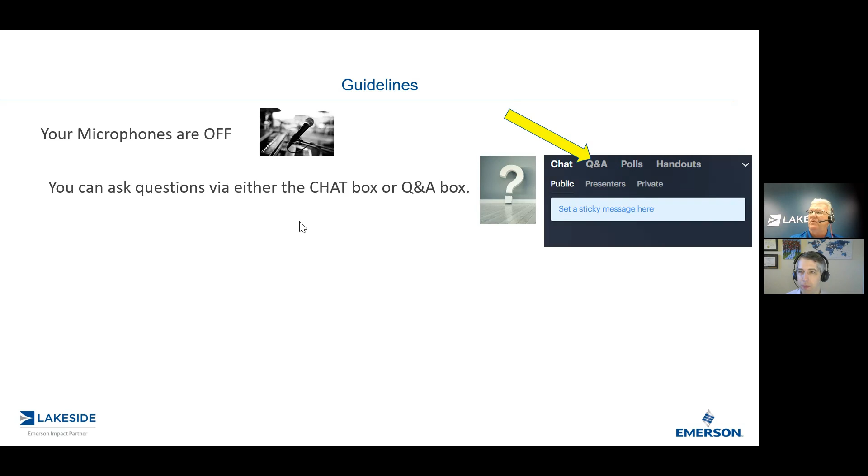And there is a 10-second time delay from the moment I speak to the moment you hear me, and that's just for better buffering and quality of presentation. So if you think that light travels at 300,000 kilometers a second, that means Devin and I are actually located in our spaceship here. I didn't manage to refuel it with element 115, so we're near the Lagrange point, and that's why there's a 10-second time delay. We can see the James Webb Space Telescope just on the horizon. So I believe, yeah, we can see your questions, can't remember if everybody else can see them or not.

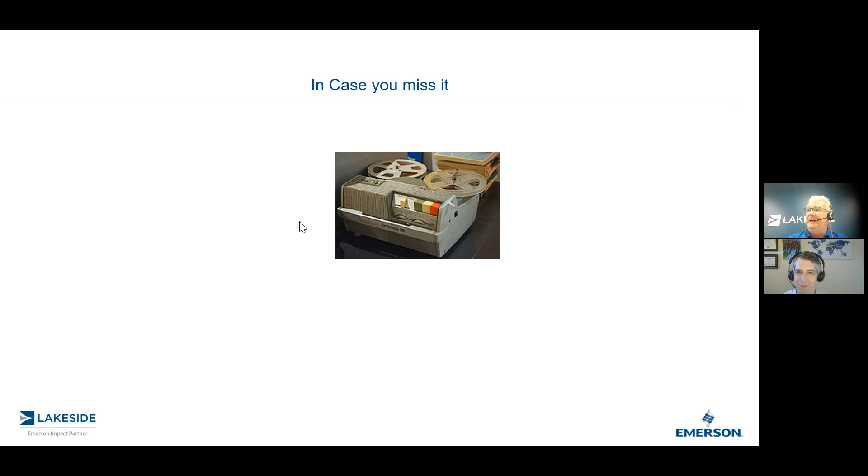A bit of a safety moment - yes, I know, kind of nerdy humor there. It is summertime, obviously barbecues, parties, and everything else. Be careful, don't drink and drive, otherwise you may be integrated with the police, so you don't want to do that. Be mindful - I enjoy my beer, but never do I partake and drive afterwards. Just be aware of that.

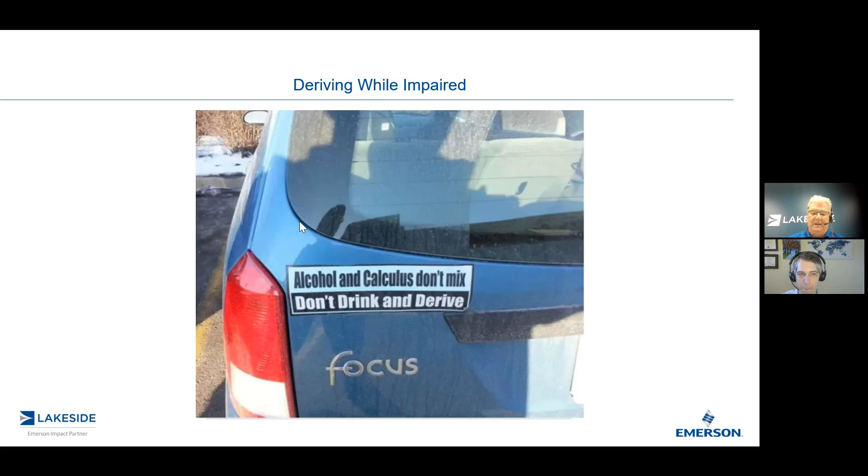A little bit about Lakeside - we'll get into Spartan Controls and the relationship in a minute here. This is a bit of a dated slide actually. We are over 400 employees. We have offices in Mississauga, Sarnia, Port Elgin, and a newer facility, not that new anymore, in Dundas, Ontario, where we actually do a lot of our fabrication, so we do skid manufacturing there.

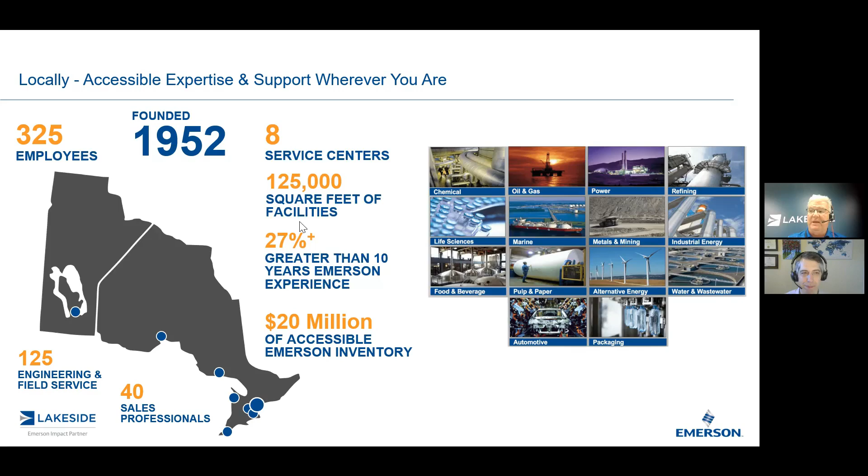Traditionally, Emerson used to do the valve repair services. That has since been downloaded to the Emerson Impact Partners, we'll talk about that, and so we do a lot of our valve repair business there. We have offices in Sudbury, Thunder Bay, and Winnipeg as well.

As I mentioned, we are part of the Emerson Impact Partners. Again, I think this slide is a bit dated - I show 21 Emerson Impact Partners throughout North America, but I believe it's actually gone down to 18 or 19. Lakeside's territory starts just this side of Kingston. I was in Napanee, Ontario, Eastern Ontario, in beginning of May - that is our territory, begins there, all the way to the Manitoba, Saskatchewan border and parts of Nunavut. Spartan Controls is to the west of us, covering Saskatchewan, BC, most of the Northwest Territories, and parts of Nunavut as well.

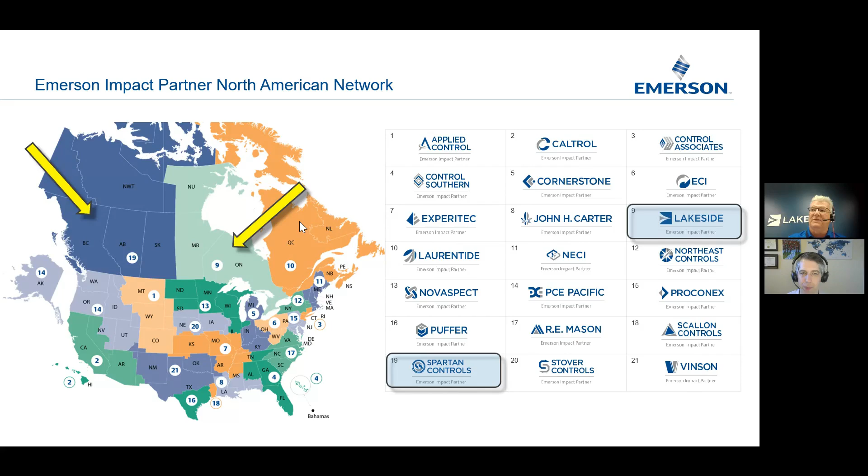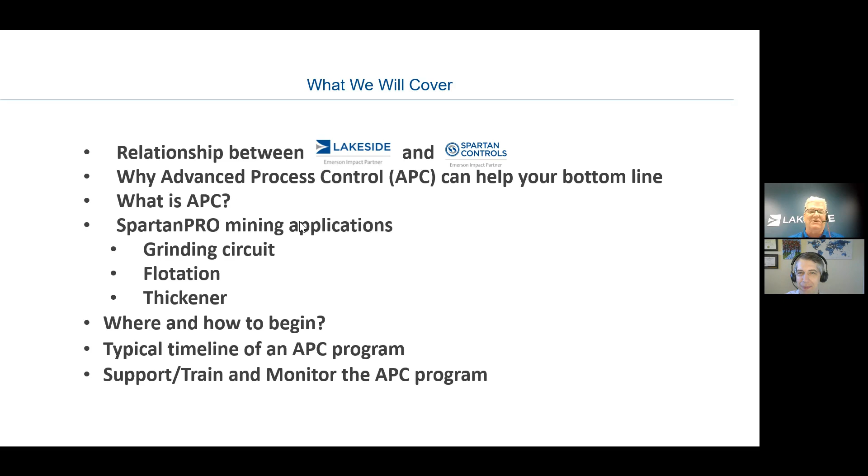What are we going to cover? We're going to talk a little bit about the relationship between Lakeside and Spartan. We're going to talk about advanced controls - what is advanced controls - and then we'll get into more specific applications that Spartan offers with Spartan Pro Solutions. We're going to show you what Devin Kuringer and I call the bread and butter, probably the more common applications out there right now, but it's part of a larger suite of offerings and solutions that Spartan offers. Then we'll talk about the implementation, the practical side - how do you implement this, what kind of timeline, and how do you sustain that technology, the magic word of 2024, sustainability, and get the maximum out of your technology.

So the relationship - as you can see, Lakeside and Spartan are both Emerson Impact Partners. It's been a long-standing relationship for as long as I can remember. Emerson decided that instead of having a large monolithic presence throughout the market, the customer was better served having a local presence, and I believe it's actually worked very well. Spartan has their customers, Lakeside has our customers, but we also work together. There are certain things Spartan offers that we leverage off, and likewise Spartan will leverage some of the stuff Lakeside offers - it's very complementary. Since Spartan offers these Spartan Pro solutions, we leverage off of that, we learn off each other, and we're able to support each other as well.

These Spartan Pro solutions cover many different industries. Obviously we're going to be covering the mining industry, but also oil and gas, oil sands - I spent a fair bit of time myself in the oil sands way back when. The coldest temperature I've ever seen was minus 48, January 4th, 2010, minus 48 degrees.

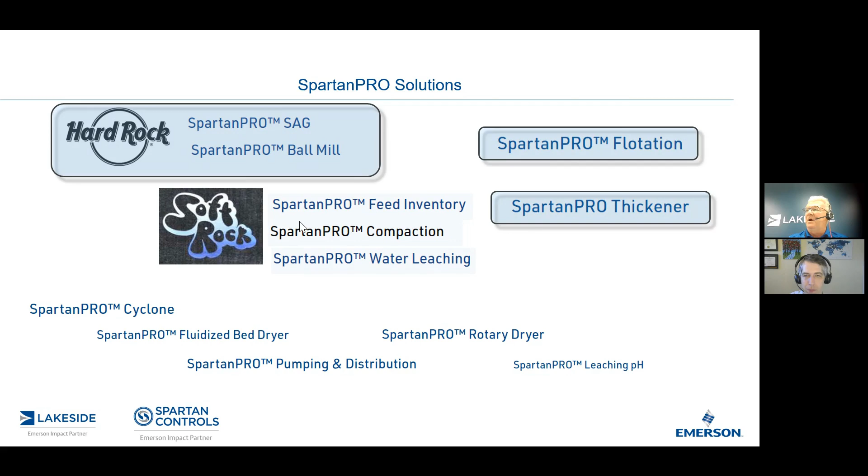In this webinar, we're going to deal with the SAG grinding part, the flotation part, as well as the thickener parts.

Spartan's not new at this - they've been working at this for quite a while. How long has this Spartan Pro solution been on the market? Spartan has been doing advanced control for over 20 years now. The first advanced control application went up in 2001. Since then, we've grown our advanced process control team and capabilities, expanded into new industries, and got into the mining industry a little over 10 years ago.

How many advanced control engineers does Spartan employ? Our team now is up to 18 advanced process control engineers, full time. That's the largest group of advanced process control engineers in Canada, and I believe the largest one north of Houston. Those of you who know Houston, the impact partner there is Puffer Controls, and it's always a bit of a fight between Spartan and Puffer as to who's the largest, for obvious reasons given the abundance of oil in both regions.

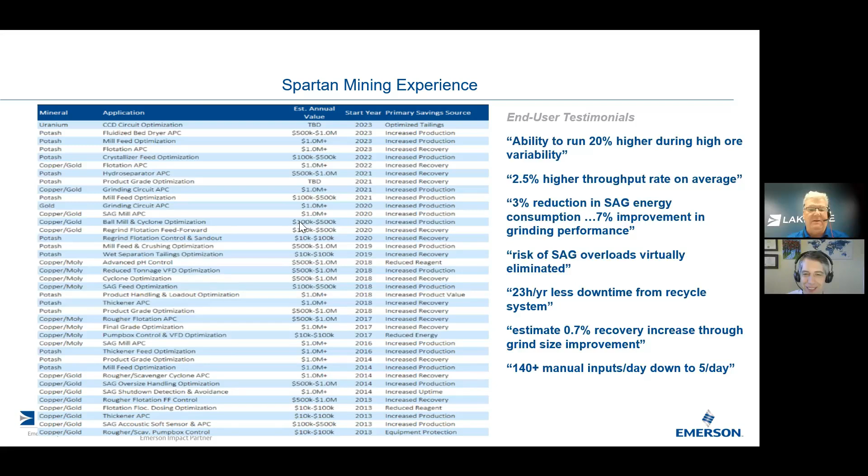No kidding. As a matter of fact, one of the applications we're working on here with Spartan Controls - not in mining - the estimated benefits we're looking at is in excess of $2 million a year. That's what advanced controls can do when properly applied. And what's the word again? Sustained - yeah, that's a big part of it for sure.

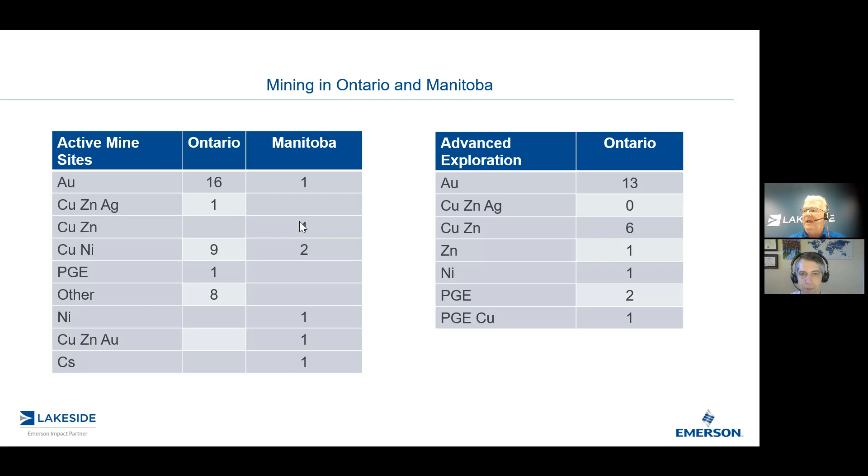In Ontario and Manitoba, I was surprised to see this. There's over 16 active gold mines in Ontario right now, and one in Manitoba. You can see copper, zinc, silver, palladium, platinum, and so forth. There's even lithium mines coming into play, and significant advanced exploration. So there's a tremendous amount of opportunities within Ontario and Manitoba right now to implement some of these applications.

Now why do we want to do this? Well, we talked about increasing throughput. Prices are good, so let's get the tons or ounces out the door. Increase yield, maximize. Let's face it, some of these gold mines are not always the richest. Some we deal with have 1 gram per ton, 2 grams per ton, which is kind of lean. Some go up to 9, 10 grams, maybe up to 20 grams. But say 1 to 2 grams a ton, you've got to be very efficient to be profitable. You've got to process a lot of rock to get some gold out.

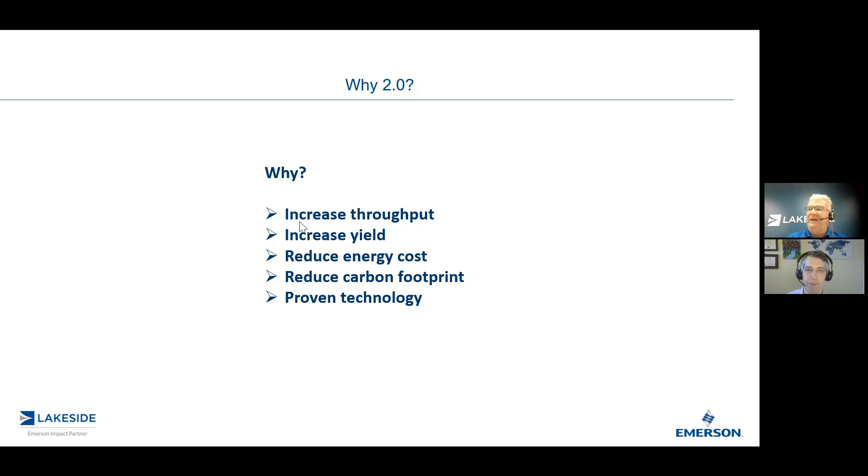Energy costs, obviously, are always a concern. Reduced carbon footprint - it's proven technology, and we all know about our beloved carbon tax. I'm not going to get on my soapbox, but greenhouse gas emissions and so forth are a concern to the industry, to us all.

Now, one thing I see there also is government incentives. There are numerous government incentive programs. Devin, can you add to that a bit?

Yeah, definitely. There's lots of avenues for government incentives, especially for energy saving projects. Lots are offered provincially, but there are also federal programs through NRCan that are available. Please reach out if you want more information on those. We can help you out with some of those links as well.

What kind of subsidies do we look at typically? They'll do subsidies typically for studies to uncover what the potential benefits of doing a project or implementing a new application to save energy would be, and they'll typically fund between 50 and 75% of study costs. Then they'll do the same for projects. Now obviously there's an upper limit on the total size of the project - if you're replacing a boiler or something, that's a bit of a different story. But for something like advanced process control in that price range, there's lots of funding programs available, again in the range of 50 to 75%.

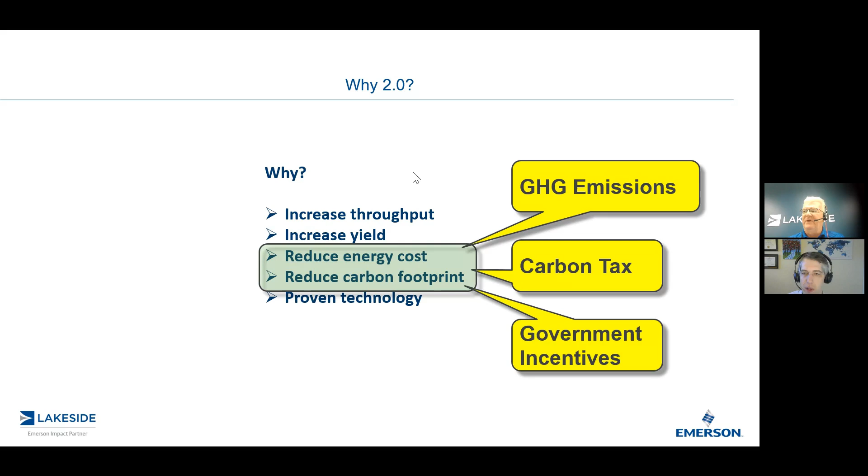That's awesome, good to know. Like I said, we can help you out with that - reach out to me and we'll set you up with the proper links and proper avenues. It's a bit of a labyrinth, I'm not mistaken. I know NRCan - I think you sent me a link once, it's almost like one-stop shopping on that website as well. Yeah, and they try to organize all the provincial incentives, which definitely vary by region. Perfect, because it can be a bit of a labyrinth, so it's not always evident.

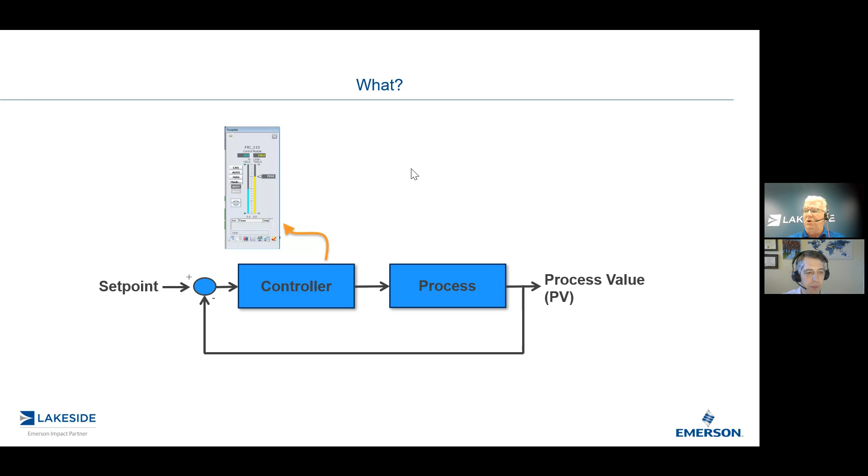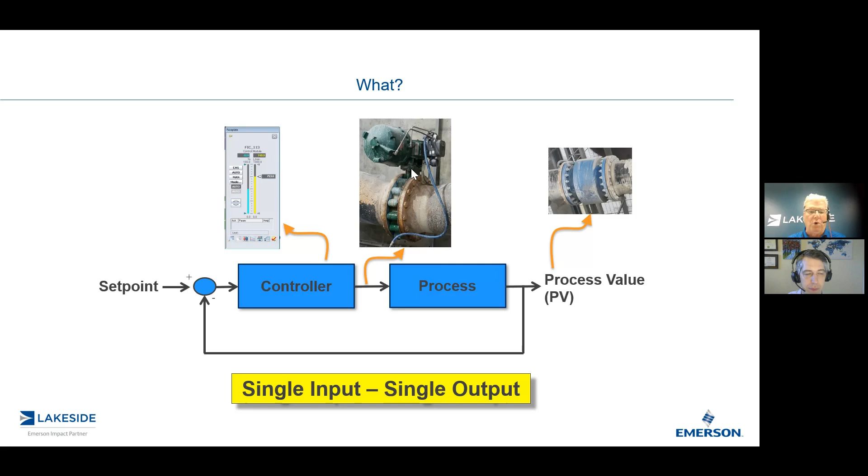So, what is advanced control? Well, before we talk about advanced control, we've got to talk about what simple control is. I think we're all aware of our regular controls out there: single input, single output. You have a flow controller - in this example, the output talks to a control valve, a positioner, and so forth. The process reacts, and then we measure the change using some measurement technology, and it comes back. This is known as a single input, single output strategy. But let's face it, no loop is an island unto itself, and processes can be highly interactive. This is where advanced controls comes into play.

Devin, do you know how many inputs it can handle off the top of your head typically? Yeah, up to 80. So you could have lots. Probably fly an Airbus with this, or a SpaceX rocket, who knows?

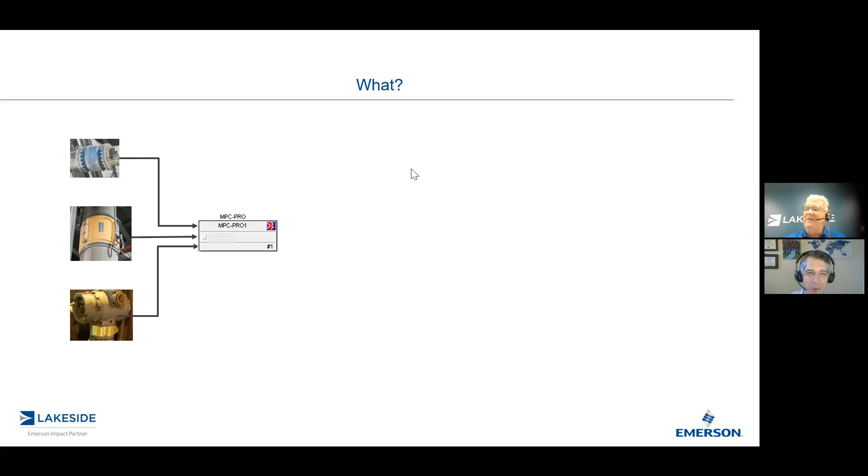So inside that algorithm, there's obviously a specific algorithm. It will then talk to multiple outputs as well. These obviously will affect your process, and all those measurements come back. So this is called a multiple input, multiple output algorithm.

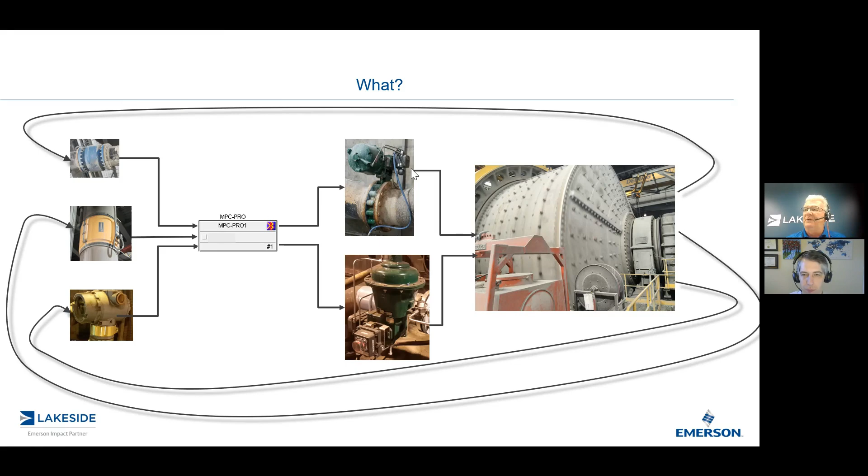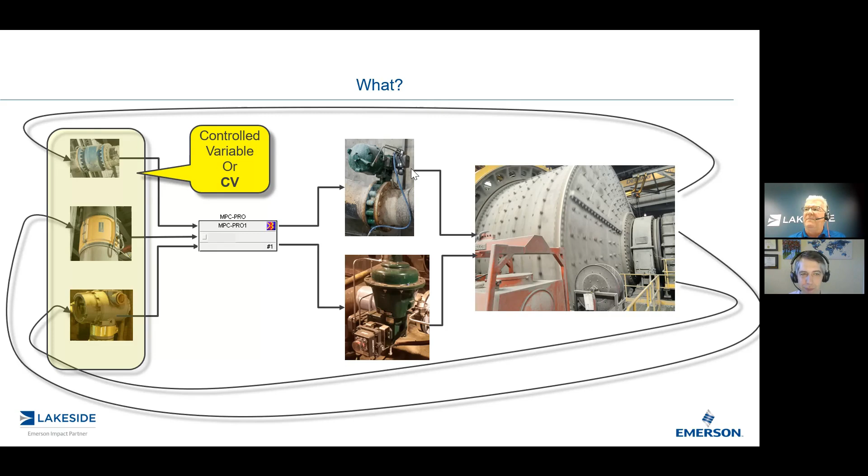Now, in simple, single input, single output control, we would call the measurements PV, process variables. The nomenclature kind of changes when you get into advanced controls. The measurements are called controlled variables. The outputs are called manipulated variables.

One last thing with this MPC algorithm is that it takes into account the interactions, meaning that if I make a change on my output one, it's going to affect my other control variable. Therefore, I'm going to do the equal and opposite change on that to minimize the interactions. It takes into account all the interaction between all the inputs and is able to minimize interactions as it makes a control action.

It also takes into account disturbances. So you've got this other measure, think of it as feed forward. Basically, that's exactly what it is. You've got this other variable out there, and every time it changes, it affects one or two or three of my control variables. So it can actually take into account and do some sort of feed forward control to compensate for these load variables out there.

It also deals with constraints. So you want to be able to maximize one or two variables. The algorithm, when programmed like this, will actually drive the output to a certain maximum constraint that we set it to, maximizing the whole throughput.

One last thing: a simple PID controller does not like process dead time or time delay. A PID controller is a very, very impatient beast. It makes a change and wants to see a reaction right away. MPC is able to compensate for the time delays. We tell it how much time delay there is, and therefore it builds quote unquote patience into the controls and is able to compensate for it. It's a dead time compensator. So it's very, very sophisticated, very advanced controls actually.

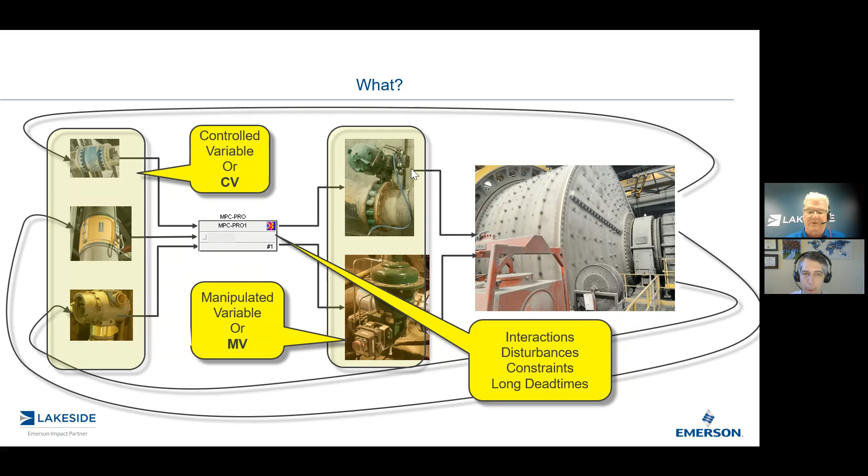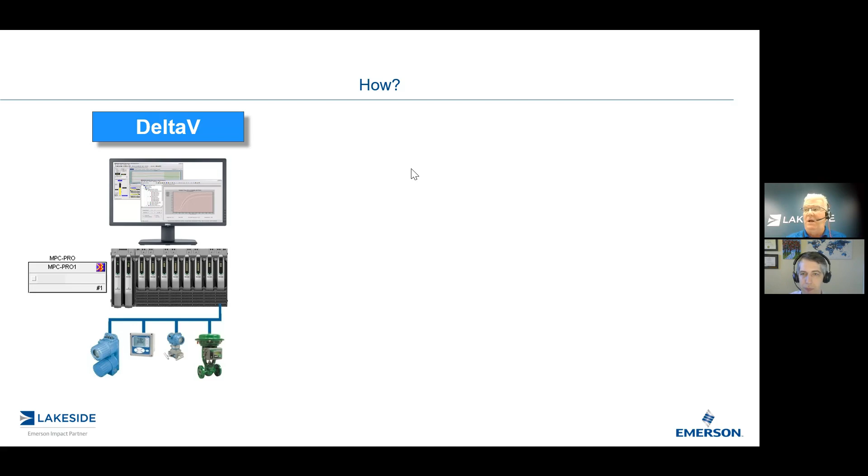So how do we do this? Well, you could do it two ways. If you have a Delta V system, the MPC Pro, the MPC Plus is native to the Delta V system, so it's actually incorporated within the actual control system, making it very transparent, very open. But what if you don't have a Delta V system? You can still implement it. What we do is implement it inside, let's say, a PK controller.

Devin, is there other ways we can implement it on non-Delta V systems? We show a PK controller. Can we implement it in different ways as well? Yeah, we can also do a server-based solution there as well. But the PK is becoming easier and easier and a more popular choice for sure. And then obviously this PK controller would control with your current control systems, your DCS or your PLC via OPC-UA.

The funny thing about OPC, if people don't know, is that it's an acronym of acronyms, which is kind of funny, because O is actually OLE, Object Linking and Embedding for Process Control. But I digress.

Devin, give us an example here. You've done DCSs. Can you give us a bit of range of other makes of DCSs you've implemented this on? Not necessarily in the mining industry, but overall in your advanced controls applications. Yeah, you name it, and we've layered Delta V for advanced process control on top of it. Honeywell, ABB, Rockwell, Foxboro as well. So for those of you out there, don't just think that it's a Delta V application. We can actually implement it on many different platforms as well.

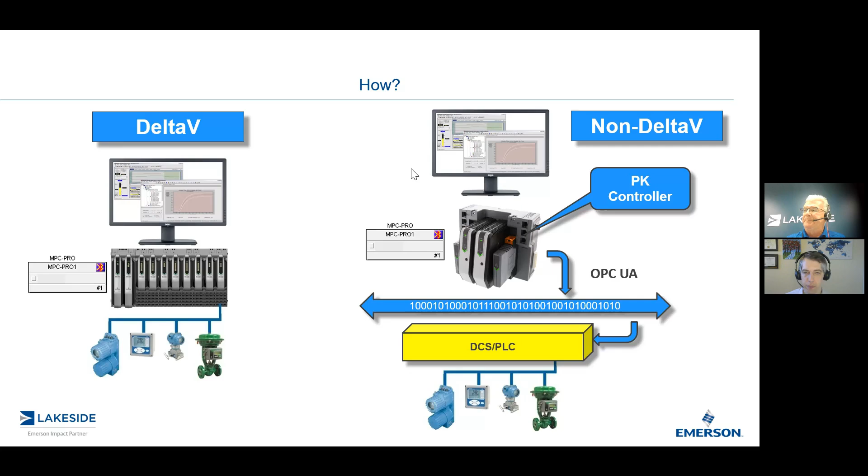Now, I usually have my own little slide here, but Devin put in his slide, and it's actually a lot prettier than mine. So let me see if I can actually do my pen here.

As we go up this way, we're going down that way. The idea here, and it's universal for any kind of troubleshooting, is that the first thing we must have is a properly designed process. Your piping, tank sizes, pump sizes, cyclones, everything else must be properly designed to achieve good control. Afterwards, we got control philosophy, control strategy - how is it programmed within your DCS to make sure you get good control? Instrumentation is critical - you've got to have the right instruments, specified, installed, and maintained. On the other side of the equation, your control valves must be properly sized, dynamic, and precise. If we don't do a good job with that, we will not be able to achieve any good PID control.

Let alone after that, it has to be properly tuned. I always say that loop tuning is the last thing you do. Not exactly true, because after that you can implement state-based control and, while we're here, advanced controls as well.

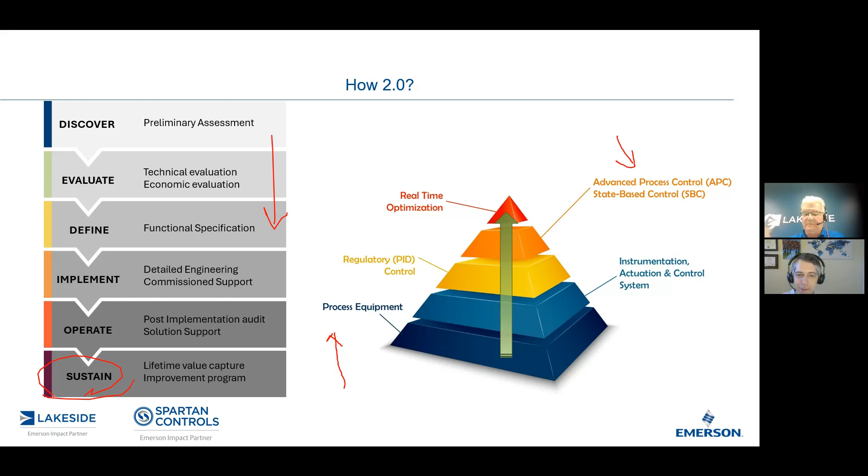Awesome, thank you. So like I said, we need to have a proper foundation. The first thing is the discovery part, the feed study, to establish where you are. We establish process-related issues, we address instrumentation gaps, and we talk about optimization of the PID loops before we even think about advanced controls.

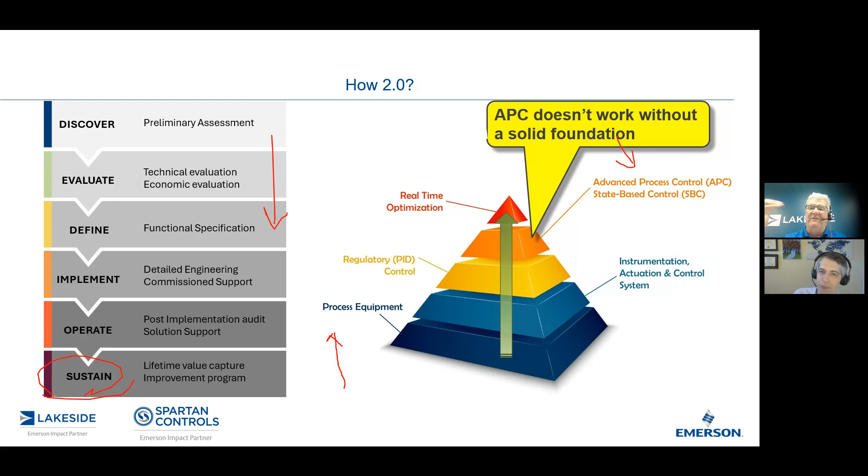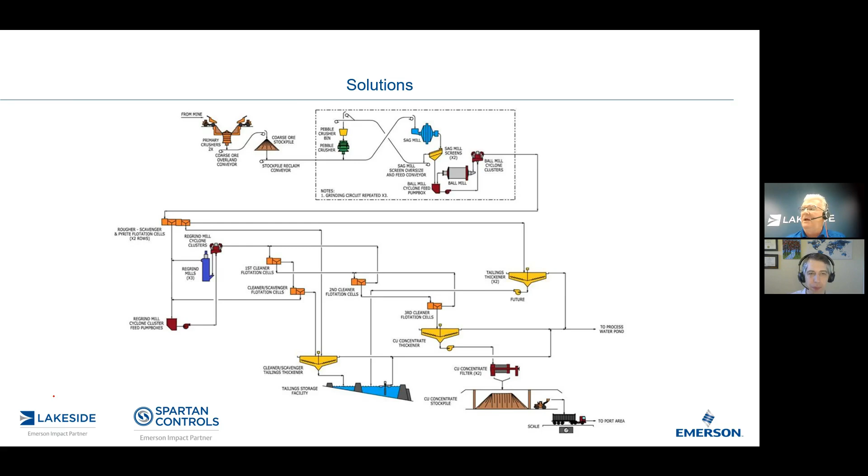So actually, I'm going to start talking less and less now. So yay, all right, and Devin's going to start talking a bit more. We're going to deal here, as I talked about, the grinding circuit, flotation circuit, and thickener circuit. So maybe Devin, you can talk a little bit more about what the grinding circuit does, and I'll let you talk to this slide right now.

Sure, yeah, thanks Sylvain. There are a lot more applications and processes throughout mineral processing facilities, and they'll vary depending on what your operation is - a potash site definitely looks a lot different from a copper mine. But we've picked three of the big ones in typical hard rock mining processes.

So your grinding circuit basically takes sized feed from the crushers and breaks it down to smaller particles that can float in flotation. With the grinding circuit, you're really focusing on getting that throughput. It's often a bottleneck, and it's also a huge power consumer, so you want to limit the amount that you use, and you need to make sure particle sizes are properly crushed and sized for flotation.

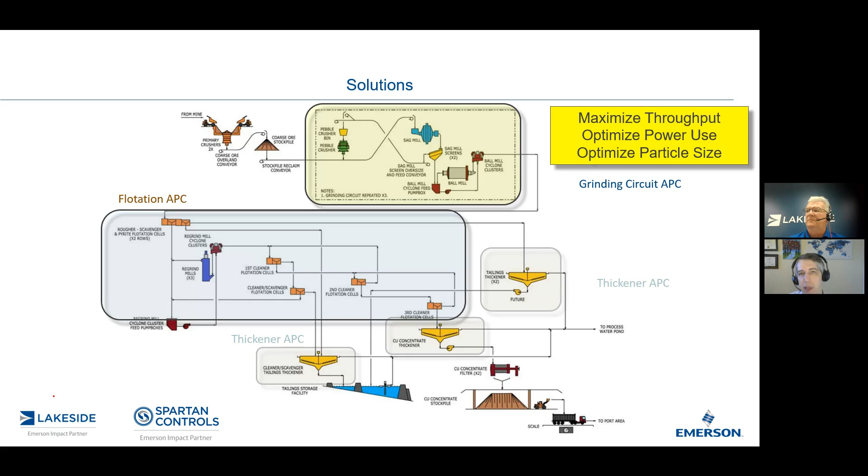Flotation's all about recovery. It's really about making sure you're separating your product from the undesirable materials and getting it to a purity that you can sell, but you're doing that in a way where you're recovering as much as possible.

And then thickeners are typically on the back end, but they can also be middlings thickeners in the middle of the flotation process as well. They're slower separation processes, typically where you're dewatering, or getting rid of, or doing a bit of dewatering before you're drying a product or a tailing slurry. So that's my understanding - the thickener may have a bit of a dual purpose.

It's to recover some of the product, the concentrate, that gets processed later on. But also the thickener is there because, obviously in mining applications, you have tailings, big ponds, and water is a big consideration from an environmental point of view and so forth. And obviously, it is.

Proper operation of a thickener helps reduce the amount of water in the tailing ponds, correct? Yeah, absolutely. The process is the same, but the application and the benefits vary depending on how you're using it and where you're using it in the process.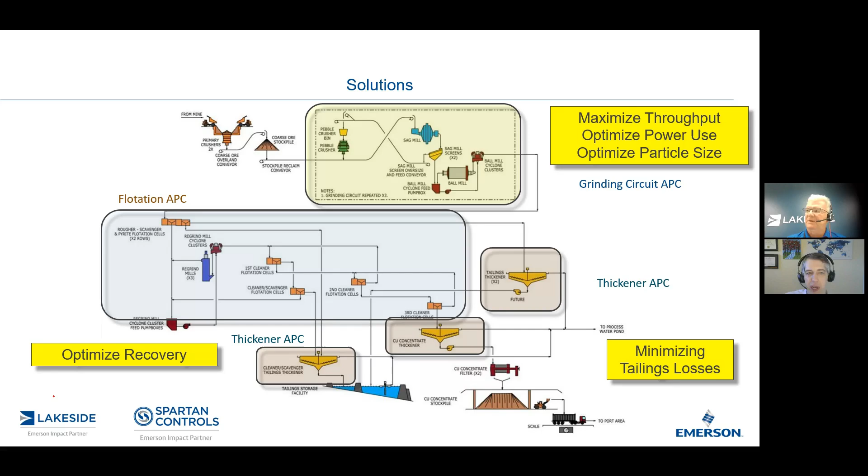Got it. Let's talk about some of the grinding circuits. I'll backtrack a little bit here and let you talk.

Okay, so this is a typical grinding setup in a hard rock mining facility where you've got crushed feed. It's taken those super large particles from the mine itself and gotten them down to the scale of inches. Then there's typically a SAG mill that feeds a ball mill within the entire grinding circuit, getting particles from inches down to microns.

So in the case of copper, they're targeting 100 micron feed to flotation roughly. So it's almost like, is that powdery form or sand form, or what texture would that have? Yeah, enough that it can float on a bubble of air. Got it basically. Okay.

Interesting. Now typically does a grinding circuit go from a SAG mill to a ball mill, or is it a ball mill sometimes? Typically SAG mill to a ball mill. There's lots of different configurations - there's rod mills in there, you can have multiple ball mills in series or in parallel. But the big one we'll see in hard rock mining is a SAG mill feeding a ball mill circuit, like what you're seeing here.

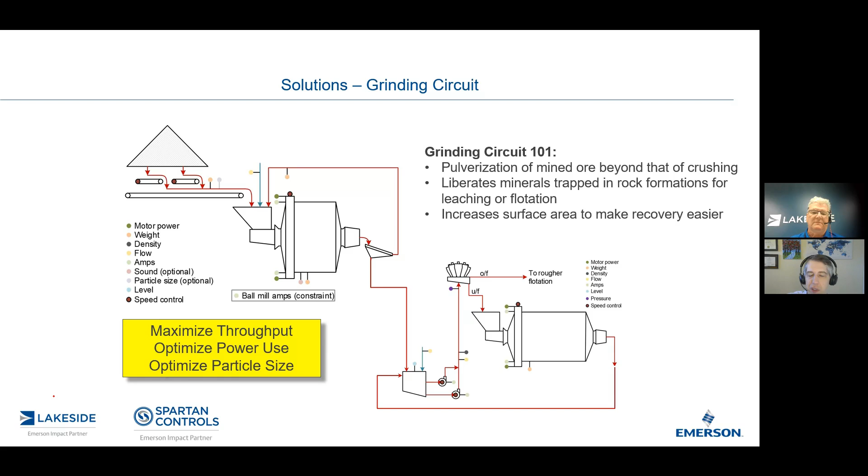They're huge energy users. Again, especially the SAG mill will be the majority of energy use on site, definitely the biggest draw. It's also often the bottleneck because it's a huge, expensive piece of equipment, so very challenging to operate consistently and reliably.

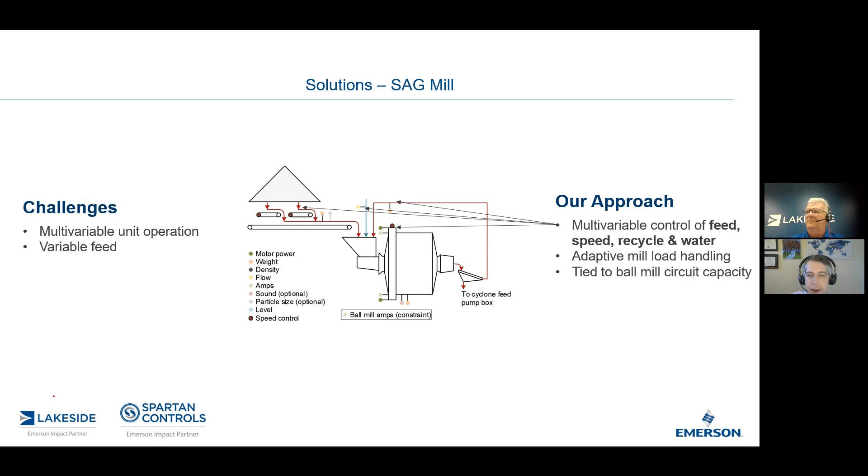For multiple reasons. A big one in mining that we'll see over and over again is that you don't have that precise measurement that you have in chemical processing or refining, where you know exactly what's coming in and exactly how much it is. In mining, you've got variable particle size, variable feed rates, variable composition, depending on where that ore is coming from and the location of the mine. And so you've got to deal with that uncertainty through controls. That's a theme that's going to be pervasive throughout this talk today.

What operations has to do on the SAG mill is figure out how to coordinate the feed rate to the mill with the speed of the mill. They're usually on variable frequency drives, not always, but most of the time. How much recycle do we feed back into the front end of the mill to maintain that optimal load, and how much water do we add to get the right density within the mill?

So it's a challenging process, and it has a huge impact on overall mill operation. It's a very linear process, so everyone's got to work together - you've got the SAG mill down to the thickener, down to the flotation. Everyone's got to work together, and you don't have a lot of buffer, not a lot of inventory, definitely.

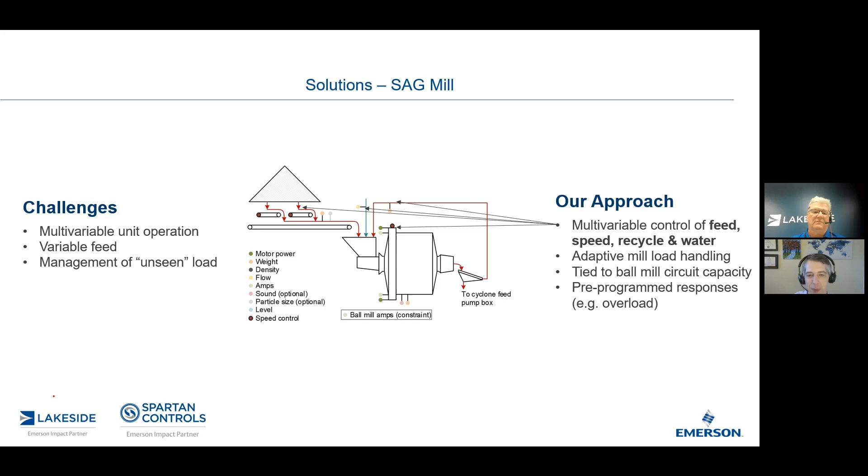To forgive any kind of changes in production rates, right? Yeah, exactly. You might have holding tanks with capacities of 5 minutes in there, maybe, that's about it. So measurement's a challenge for sure, especially on the feed end. There are starting to be more and more camera-based analytic sensors that might be able to get you particle size information, at least on the surface.

But a crucial part of this is measuring the load in the mill itself. We've worked with sensors based on bearing pressure, which will sort of give you the weight, but it's subject to drift based on how well maintained that bearing system is, the state of the liner, all sorts of other factors based on the state of equipment. I'd say best case scenario for a lot of these applications is if you've got technology like an acoustic array or a mill slicer that will show you exactly what the load is in the SAG mill itself, as well as where you're getting that impact point, which is a critical control variable.

Okay, cool. So you actually have acoustics that listen as it's rotating, to where it's actually falling on the other side? That's right. Wow. And there's a big difference in sound if you're impacting rock on liner versus rock on rock, versus if you're building up a large load and it's not falling as far.

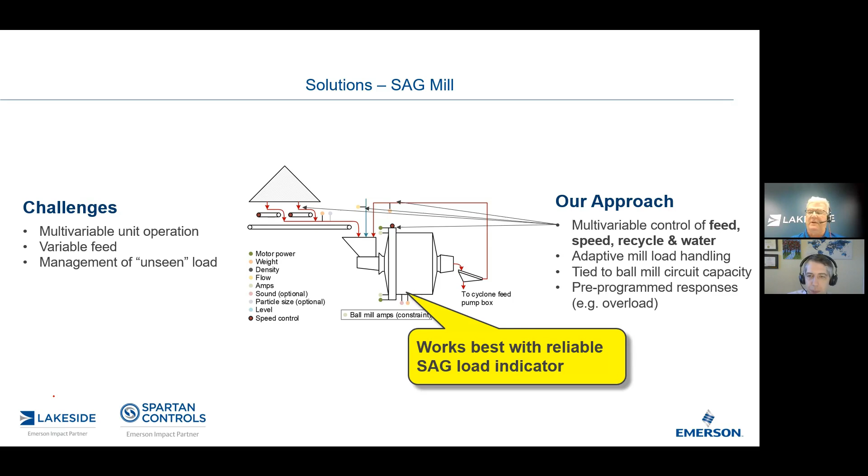Interesting. Okay, very cool. So what am I looking at here?

So this is a bit of a before. We've got a nice before versus after shot here, but this is the before case. Basically, operators have a pretty hard trip limit on the unit. They've set an operator alarm, shown as the red line there, a little bit away from the trip limit, and the trip is based on maximum load of the mill. They want to make sure they're not loading it up so much that the unit goes down and they lose a whole bunch of throughput.

So you can see over the course of roughly a month that operators deal with a ton of variability. Again, this is variability from feed quality, feed rate, composition, and hardness. So operators try to keep it safe and move it away from that trip limit.

What we've been able to do with control is coordinate the inputs and also get a bit of adaptive control in there. So when we see that variability start to increase, probably because we've got harder, larger particles feeding the mill, we'll actually back off of that limit a little bit more. Then when we get fine, nice, easy to grind particles, we'll push up against the limit. So we can run consistently within the level of tolerance, even under varying feed conditions.

This is an awesome before versus after shot, showing an average increase in throughput of about 2.5%. What this isn't showing, though, is that they were actually able to take that limit, which was set away from the real trip limit, and move it up because they had way more confidence in it. They were able to get a lot more than double the incremental benefits from running on control there.

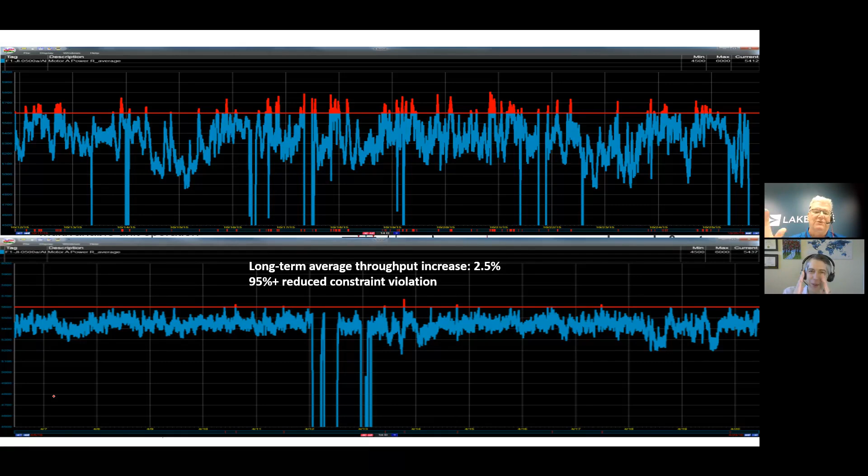Yeah, that's sort of your classic example of optimization, basically, right? Reduce the variability and then shift it. Exactly, yep, you got it.

What you want to do is keep that recirculating load at a nice steady level, so the ball mill is doing work and grinding, and you're getting good particle size out of the top of your cyclones going to flotation. What you really need to avoid is overloading the circuit, though, because that can quickly fill up the ball mill, which is a bit of a cascading situation. If that happens, they'll have to shut down the process. Hopefully they can catch it before operators have to dig it out, because that's definitely an undesirable situation.

So it's really important not just to control the way you're running your cyclones and ball mill, but that it's coordinated with sag mill operation. So if you see this start to get overloaded, you can actually dial back on the sag mill and sacrifice a bit of temporary throughput, so you don't run into a situation where you're overloading the circuit and down for a while.

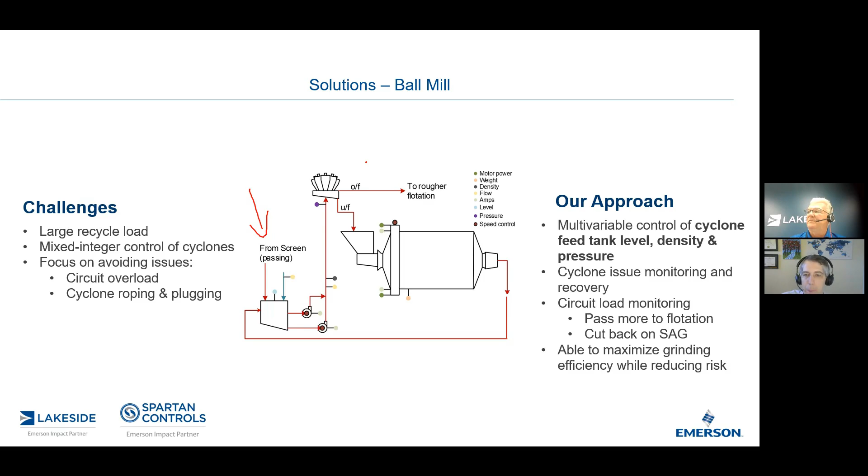Perfect. Talk a bit about flotation here. So how does flotation work? Right, so flotation, again we're moving downstream, like you said, linear sequential process. The feed for flotation, at least the rougher cells, is coming from that ball mill and the overflow cyclones usually. Flotation is all about applying a bit of a surfactant or reagents that bind to the desirable material and make it hydrophobic.

The reason we want to do that is hydrophobic material doesn't like being in water. So then we put it in the flotation cell. We pass air bubbles through the flotation cell, and again, it's a fine particle. So those hydrophobic particles want to get away from the water. They'll bind to the air and float over the top of the cell.

The more you try to recover all of the desirable material, the more you've got to pull over the top. And as you pull more and more over the top, you start to get a little of that undesirable material, the tailings. So you want to maintain that minimum viable or acceptable grade, so you still get that separation, but try to maximize recovery while doing that.

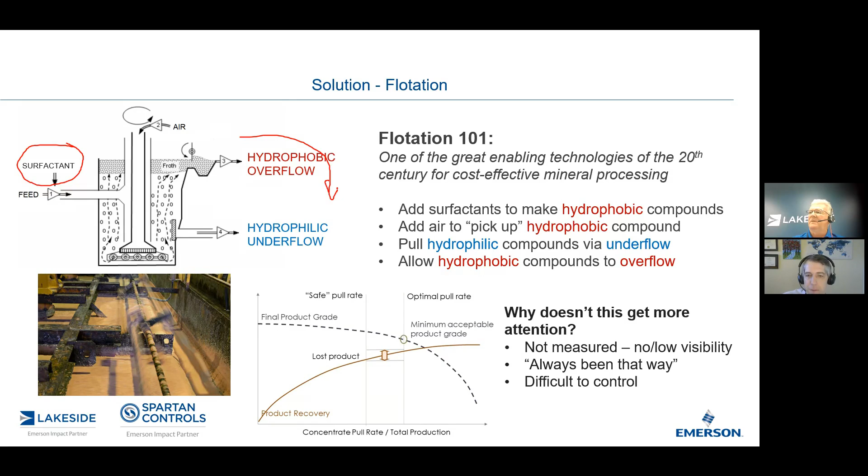The best thing you could do is get somebody who knows to tell you when the froth in the rougher cells looks the way it should. Then you take a good long look, and try to keep it that way.

So basically, looking at that statement, it's just sort of, if it looks good, I look at it, all right, looks good, or I think I should do this, and then next shift comes around and says, well, no, I don't like it to look like this, I like it to look like that. So you've got a lot of subjectiveness involved, and I think that's what we're trying to do, is make it more consistent, more deterministic, more measured.

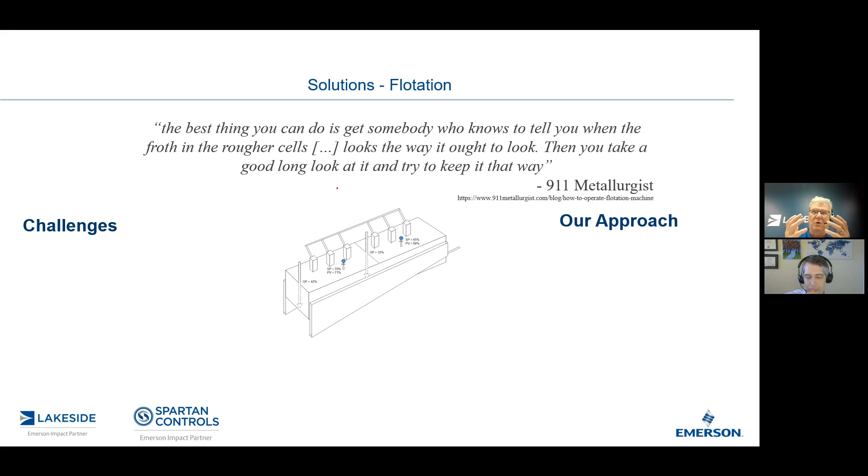And this measured operation is what we're trying to do here, right? Exactly. That works if you've got very experienced people that know the process inside out, assuming they're out looking at the flotation cells at all times and know exactly what to do in every situation to respond to it.

So I think we can do better with automation, and we've shown that we can do better, especially when you get those newer, greener operations crews in there that don't have the ability to do that well.

It kind of reminds me a bit. Those of you, if you ever saw me, you know I like to eat and cook, and it reminds me of when I make chili. If you like the chili I made today, enjoy it, because I'll never make it the same way again, I just kind of wing it. But when I make bread, I do make my own bread as well, and that's one thing where you have to be scientific. You have to measure by weight all your elements, so many grams of flour, water, salt and sugar and so forth. If you don't do that, your bread might not be very good, but all too often I made doorstops until I started measuring everything. So making bread, you have to be very specific. If you want to make chili, well, you can go ahead and wing it.

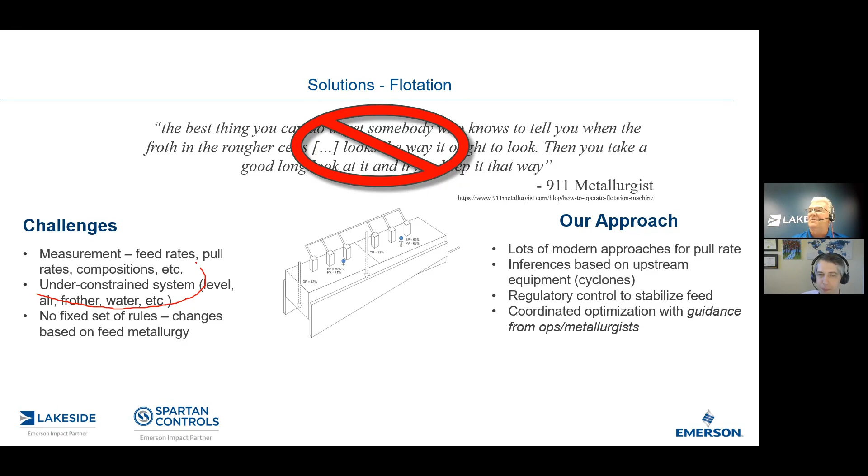One thing I see here, Devin, is under constrained system. What does that mean, under constrained system? Yeah, that's kind of one of the keys to control. So basically, you're trying to control the pull rate or the amount of froth that you're getting over top.

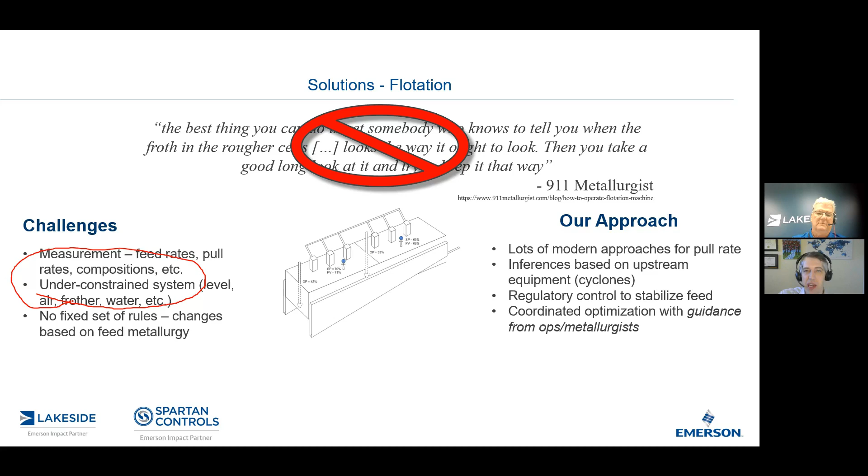The reality is there's lots of ways to do that. If you want to increase the pull rate a little bit, you could add a little more reagent, you could increase the airflow so more bubbles up, or you could raise the level. There's multiple ways to do that. If you're looking for a small change, you can maybe pick one and bump airflow up a little bit, and that'll get you a little bit more.

But if you're looking for larger changes, or changes over a long period of time, that approach doesn't really work that well. Basically what ends up happening is you make a little change, let's say you bump up your airflow, you start to get a little more over top. But if you continue to raise the airflow to try to get more over top, you start making the float cell very, very volatile, and that starts pushing over that undesirable material, and you lose that separation effectiveness. You start getting tailings over the top.

So basically, what this boils down to is that our philosophy for control of flotation cells is don't just use one of these handles, let's coordinate them and move them all together. So if we want a little more concentrate, we'll add a little bit of reagent, add a little airflow, and bring the level up. This way, we get a consistent, reliable performance out of the flotation cell.

So it means there are multiple ways to fix a problem—a little bit of this, a little bit of that. That reminds me of today: apparently it's going to be a hot day. I don't have fancy controls on my truck, just an air control, so you can have AC on maximum with a little fan, or less AC with more fan. There are different ways of controlling temperature just by adjusting the fan speed and the intensity of the air conditioner. I guess that's what under constraint means—there are multiple solutions, and this tries to accommodate all that.

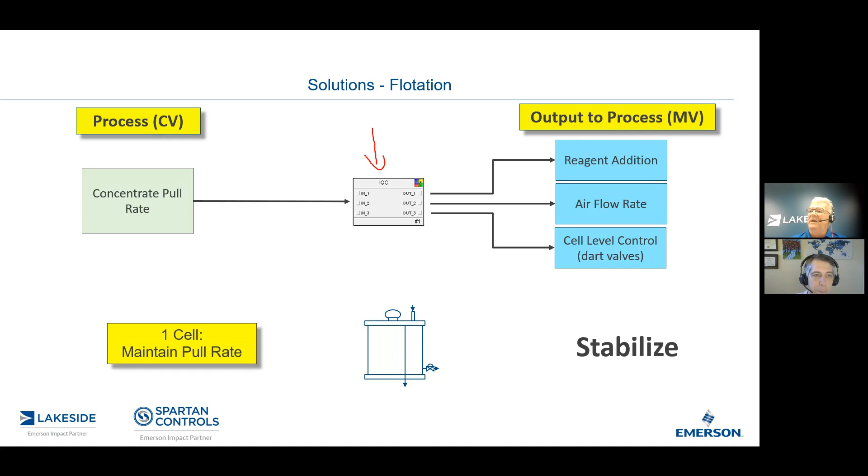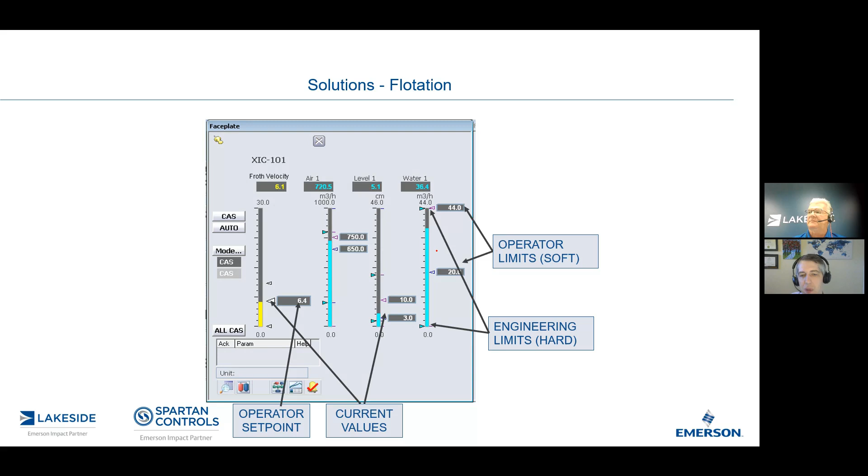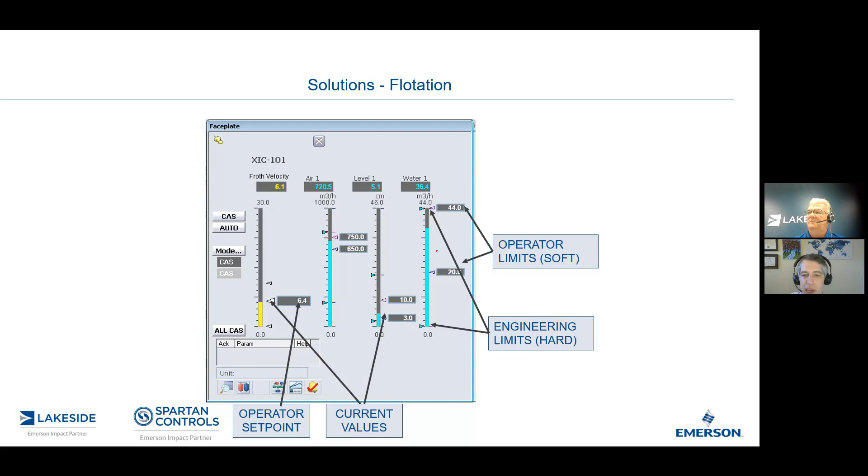Now I see you could do that for one cell, but you can also do this—there's a faceplate for how it looks. One key thing is that we get operators and metallurgists to interact with this control strategy—they set the upper and lower limits. This is valuable and has led to high adoption because feed conditions for flotation change all the time, and we almost never have the measurement technology to detect incoming changes to composition, particle size, or hardness coming out of the grinding circuit. So the reagent amount you use one day can be totally different the next, just based on where you're digging in the mine or where you're getting feed from. Until we get AI to tell us exactly where that is, it's a little difficult to come up with consistent control that always does the right thing. So by giving operators and metallurgists these high and low limits, they can guide the process or set boundaries based on where it is, without having to babysit it to make sure we're constantly pulling a decent amount of feed or concentrate from the flotation cells.

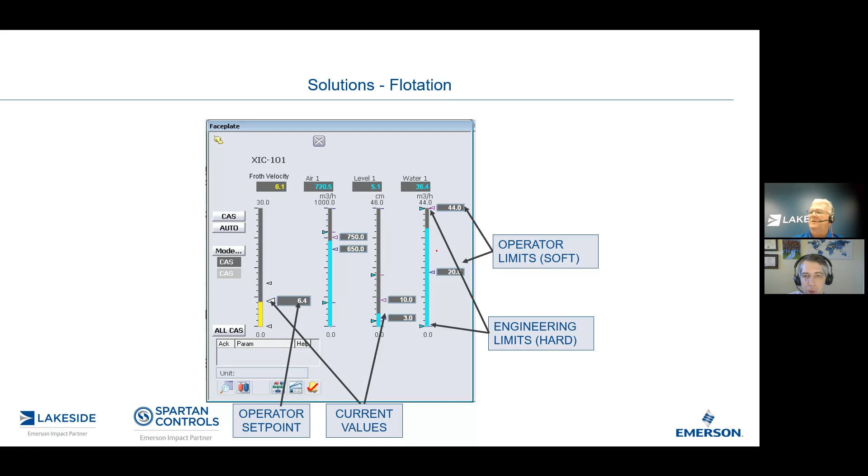From one cell we can actually work on bank cells, and then multiple banks after that. The quick version: we don't want to pull the same rate from every single cell—you get higher recovery off the first cell and significantly less off the back cell, almost always. So if you need to drop pull rate because of a change in flow, it's better to leave the first cells high to maintain that recovery, and drop the flow off the last ones, then slowly stabilize. This way we achieve stable control without significantly upsetting or disturbing recovery.

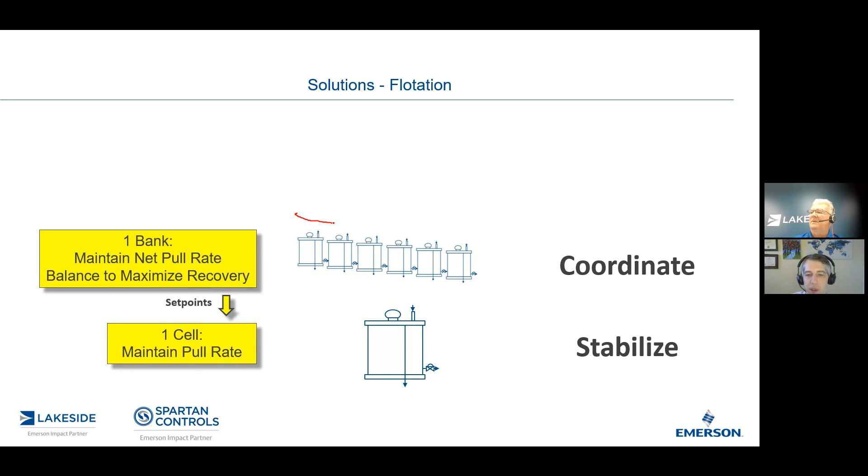And most of the recovery, correct me if I'm wrong, is usually done at the front end, and the rest is just picking up the crumbs after that. It is, yeah—depends on the process, but it definitely decreases over the number of cells in series. Perfect, okay.

This strategy, basically the way we've set it up, is IQC will cascade to the local individual cell controller, which adjusts things like airflow, frother addition, water addition, cell level, and reagent addition for those individual cells. So we've got a local controller maintaining stability within the cell, and then an overall controller coordinating the different cells.

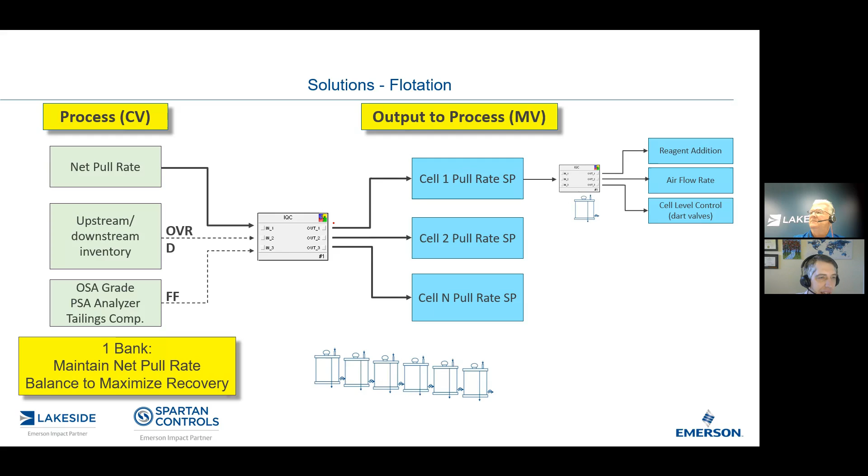So it goes further up in sort of a hierarchy, I guess. Exactly, and it doesn't stop there. We won't just stop at an individual bank. We can actually look at the circuit as a whole, and with the circuit as a whole, we can coordinate what's going on the roughers or coarse flotation versus the scavengers versus the cleaners and tailings.

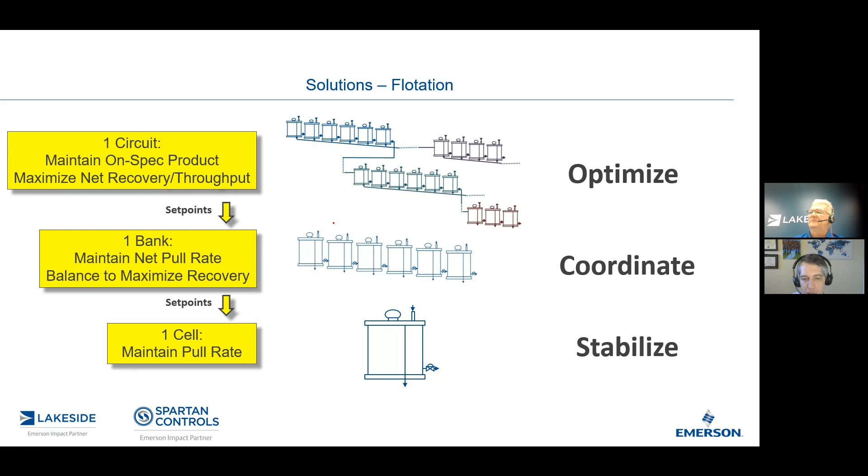If we're a little bit low on product grade, we can decide to back off a little bit, and we can do that selectively, like maybe back off on the scavengers before we back off on the roughers. Or if grade is high and we want a little bit more net recovery, we can also pull a little bit harder across the entire circuit. So it really helps drive that value, and we had that pull rate versus recovery trade-off curve that we're really trying to optimize with that top layer.

Awesome, okay. Yeah, and I believe if you... I think we keep clicking there. Okay, yeah, sorry, I guess I spoke ahead of this one. No, that's all right, yeah, it happens to me.

It really is about coordinating the entire flotation circuit across site to maximize that trade-off between grade and recovery. Awesome, and that's where the money is, actually, to be able to maximize. Yeah, stability's nice, but this is really where the money is for sure.

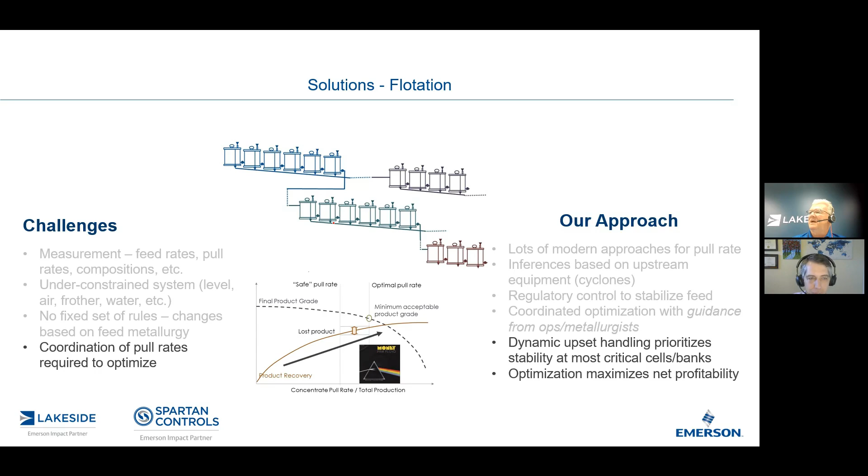Exactly. So when you zoom out, this is what the control strategy looks like as a whole. We're trying to control product grade, but then we've got decentralized control, so we've got separate control for the roughers and separate control for every cell within the rougher. And all this has to be looked at by the metallurgist in conjunction with the lab and the operation as well, so they'll make these adjustments on a daily or weekly basis. I guess it depends on the grade of the ore that they're pulling out.

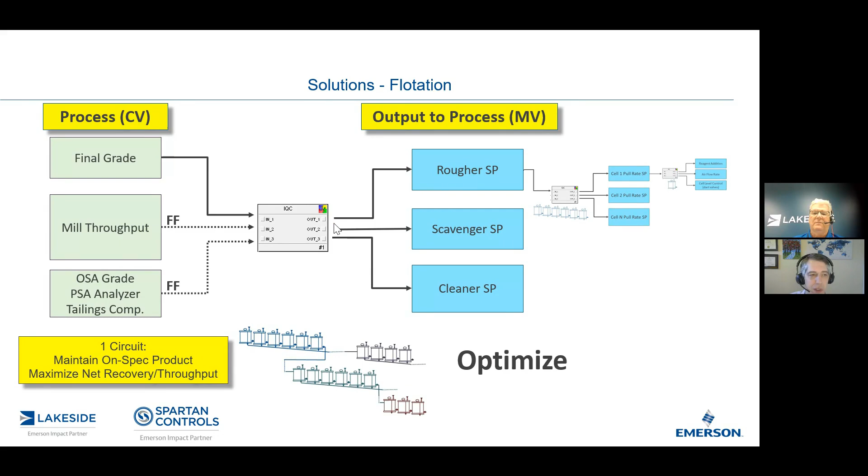Yeah, some mines are nice and consistent and have steady supplies of high consistency ore. You're probably jealous of those mines because most of them vary from day to day or week to week, and you've got to make adjustments. Metallurgists have to make adjustments based on that. Interesting. So we're trying to take the best of both approaches, where we're putting the power in the hands, and we are still relying on some input from operations and metallurgists, but they're really there to guide and manage the process rather than having to micromanage it with every small feed rate change or minor upset.

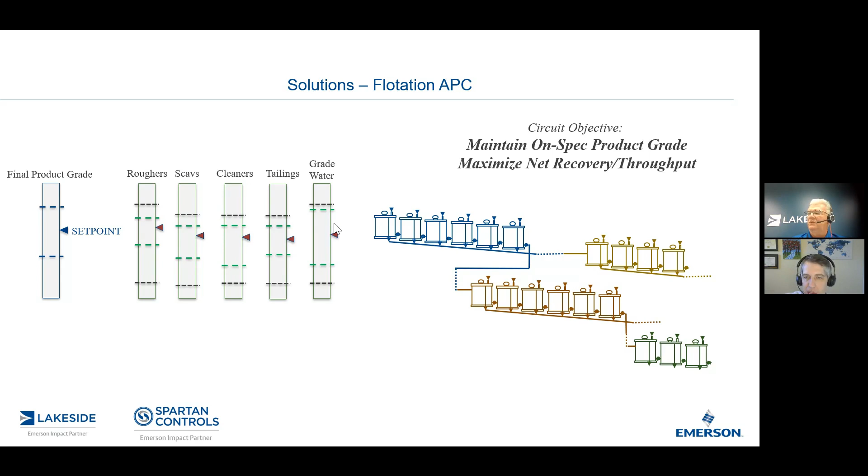Okay, let's talk about, there's more about flotation. Yeah, go ahead. So it drives a lot of value, and a lot of times this is tough to measure directly because you're not measuring recovery rate or grade off of each one of those individual cells or banks. You're just kind of measuring final tails and final product, and lots of things change day to day at the site.

But we've done a bunch of these projects, and all of them are around the same value where there has been an increase in grade. We're not entirely sure how much to fairly assign to flotation advanced controls, but it typically falls between 0.5% and 1% increased net recovery, which if you're a mine that's already running 89, 90% recovery, that's huge. And it can have significant value.

People don't think that just 1%, 0.5%, 2% - I mean those are big numbers. It's the gravy, it basically is the gravy on top of your French fries. Yeah, and there's also no increased operating cost, or very minimal increased operating cost for that, because you're not increasing the amount of ore that you're processing or mining from your facility. You're just getting more out of it.

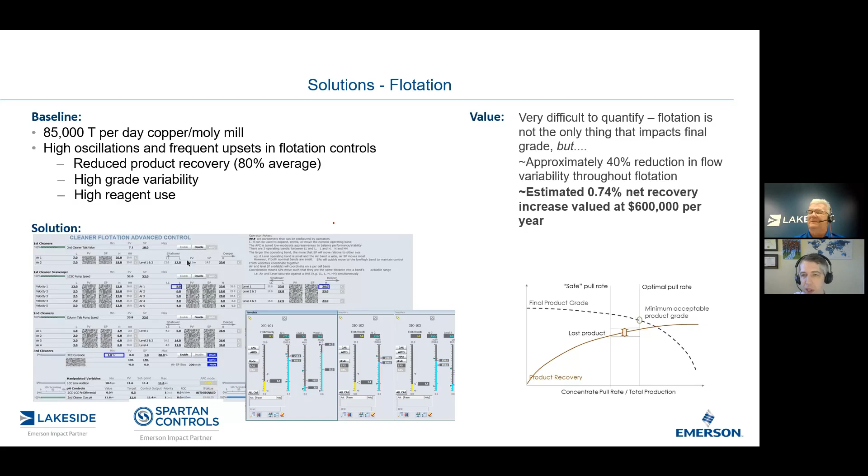Exactly, awesome. Let's talk about thickeners. Last but not least, it's a simpler control problem, and again, there's lots of different applications for thickeners. So you've got middling thickeners, where it does impact product recovery. It's a big, slow separation process that may be somewhere between the roughers and the scavengers to improve removal of the tailings and better separate your product. Or it can be final tailings thickeners, where you're trying to remove the water, reclaim the water, and minimize the rate that you're filling up your tailings pond at. So lots of different use cases here.

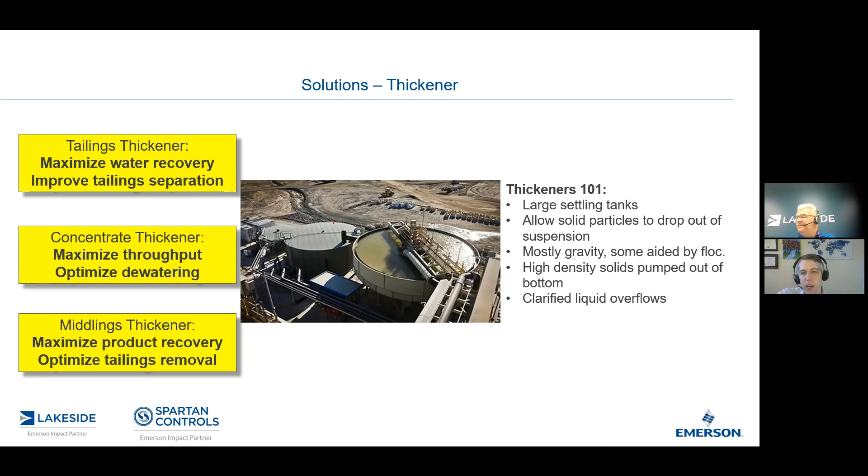But what they have in common is that they're these large, really large, high residence time settling tanks. And what they really do is they allow the solids product to settle to the bottom, and then it gets removed out of the bottom. And then over the top comes the clarified, or hopefully clarified, water or brine, whichever it is.

So the real challenge here is that it's slow. And this is why model predictive control is an effective control strategy, right? It's really tough for human operators, you, me, to react to changes that took place because of something that happened 3 or 4 hours ago. Like our brains just don't work that way, especially over things like coffee breaks and shift changes.

So when you get to thickener operation, there's a tendency to run safely. And safely in thickeners usually means pulling thinner underflow than you normally need. So you're just pulling more out of the bottom, and you're not doing as effective a job of really separating the process.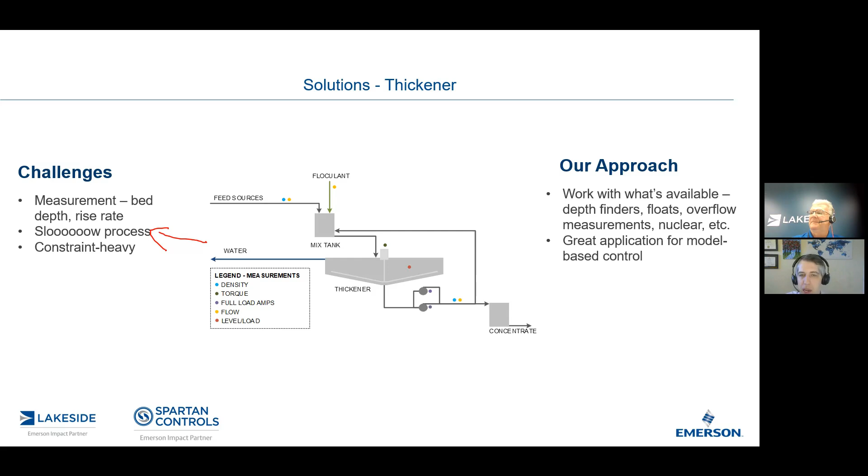Oftentimes there's a lot of value. If you can do a better job of predicting what's going to happen, you can increase that underflow density, or underflow solids, to a kind of a maximum level that your underflow line or underflow pumps can handle. Then you can do a better job of separating. You can also watch, some applications require that you watch the turbidity of the overflow, so all sorts of constraints you can incorporate there. But MPC does a great job of this, again, not because it's an overly complex application, but just because of that long gradual dead time.

Got it. Yeah, we're all, let's face it, we're all impatient, right?

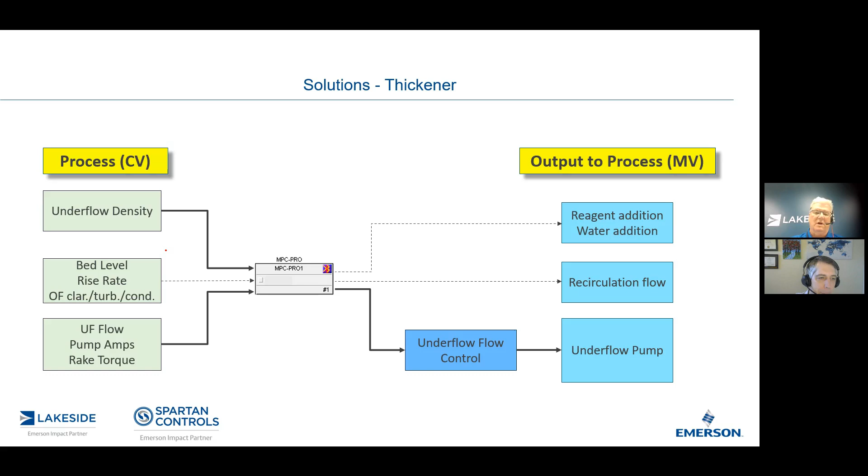Yeah, absolutely. So again, results are going to vary. In a tailings application, we can do significant reductions in the amount of water loss that you get while still doing an effective job of separating your tailings, which can have a huge impact, not day to day, but over the lifespan of a mine. It can be massive.

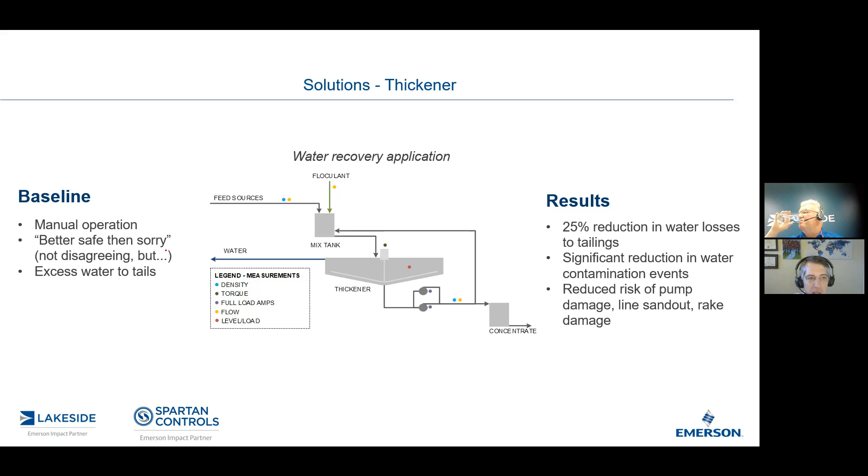Other applications where you're trying to increase, where you're actually recovering product, thickener operation, despite the simplicity of the application, if you go to the next one there, it can have huge value. And again, being able to increase product recovery just by getting higher solids out of the bottom can have massive value for operations, which matches or exceeds some of the other applications throughout the process.

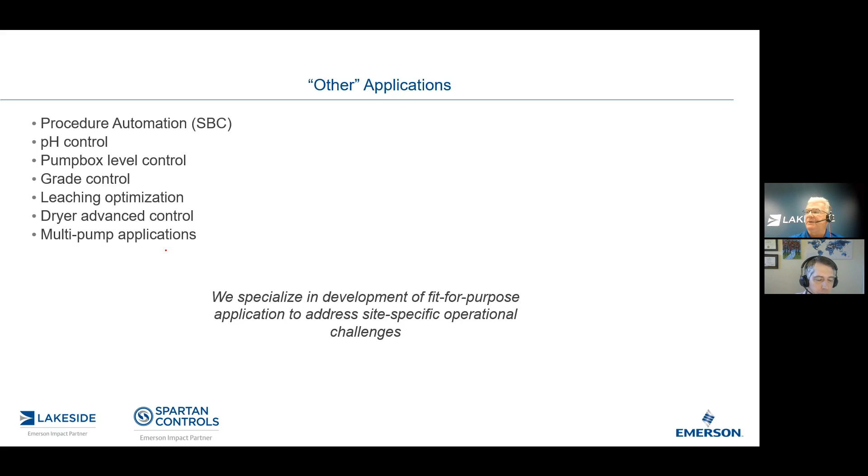Now, okay, so we want to implement this. What sort of timeline are we looking at here?

Yeah, so it varies, but we want to follow a process that leads to sustainable operation and realization of the benefits. So for a typical application, we'll start off with a proper front-end engineering design phase, make sure that control foundation is in good shape, and make sure we have the functional requirements and all these operating scenarios that we need to handle well developed. Then we'll go to configuration, testing, and then finally tuning and commissioning. So that whole process takes roughly 4 months, start to finish.

Of course, it's a little bit different if you're doing one thickener versus the entire flotation circuit, so there's a little bit of flexibility there. And it all depends also on where the instrumentation gaps are. You need to buy new instrumentation, do this, do that, or even some process modification. I mean, let's face it, that's going to take a while too. So that's sort of the big unknown, the front end engineering will determine that, and that's where that uncertainty of time based on what's required to get the maximum out of your APC comes from.

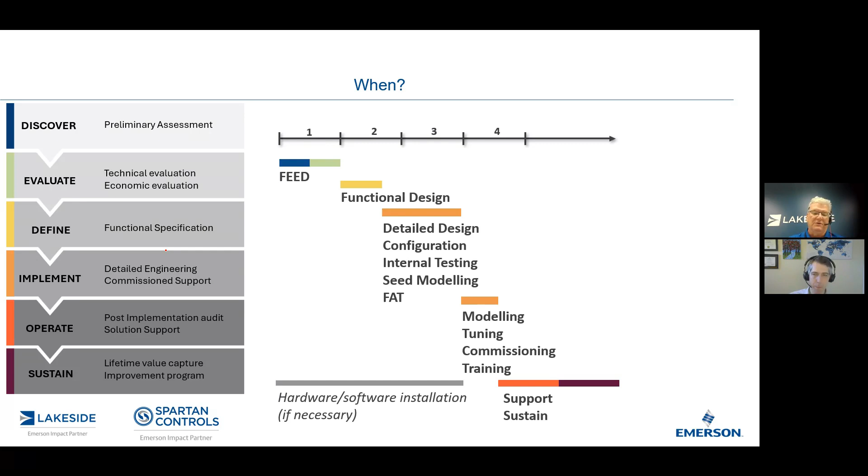So we got some hardware, and if it's a non-DeltaV system, some hardware and software that needs to be implemented as well. So now we got it running, we're all happy, and then suddenly, what happens most of the time, very often, is the fact that it gets turned on, it works, and then it gets used a little bit less, a little bit less, and it kind of dies a slow death typically.

This is where the difference is, where what we are offering, what we actually strive for, is to make sure that it is sustained, meaning that we're able to maintain that system, and that requires constant monitoring of the process, of the controls at different levels, at different timelines, to make sure we're getting the maximum out of our controls.

I think this speaks to the value that Emerson, I'm biased, but the Emerson Impact Partner Network, where we are local, we're not going anywhere, our customers aren't going anywhere. We want our customers to be our customers for life. So we need to make sure these applications don't have just a 3-month or 6-month lifespan. Sustainability is important, and it has been from day one for us.

The effort doesn't need to be massive, but it does need to be planned and intentional. So on a week-to-week basis, we just want to watch KPIs. Something as simple as our operators using it is often a good early warning indicator. If it's not working or if it's doing stupid things, they'll stop using it. And the faster you can get on that and correct situations that are occurring, the better. It might be a faulty transmitter, or it might be that the controls don't handle a specific scenario as well as they should.

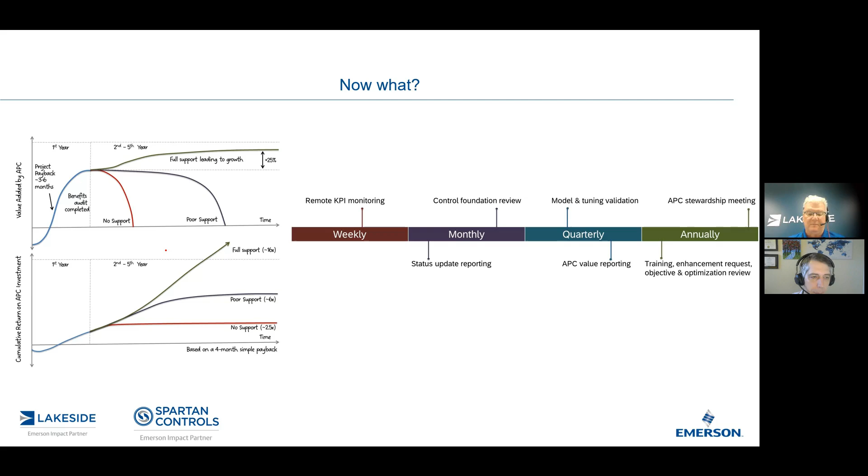So where do we begin? There's a 1 to 4 day investigation here. Some customers know exactly what process they want to start at - the grinding circuit's a huge problem, let's start there. Others aren't so sure what makes the most sense for advanced process control. So one thing we can do is come in and do one of these advanced control opportunity assessments, and basically determine what makes the most sense - which area you're going to get the most payback for, has the lowest risk, are you set up for it most effectively on the instrumentation and actuation and regulatory control end. So we can help make that investment decision easier.

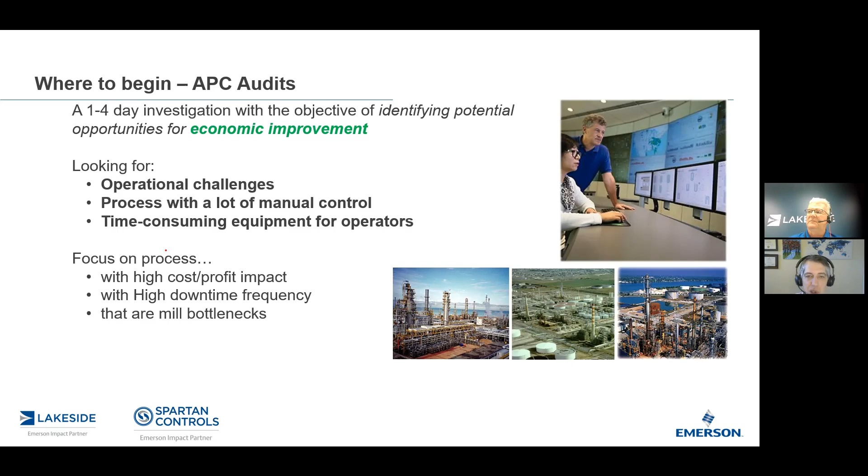And we'll try to deliver it in a clear and concise method that evaluates effort versus payback. It might flag some applications as not making sense under the current economic situations, versus other stuff that's a quick win or a no-brainer. And those are really the ones we're looking for.

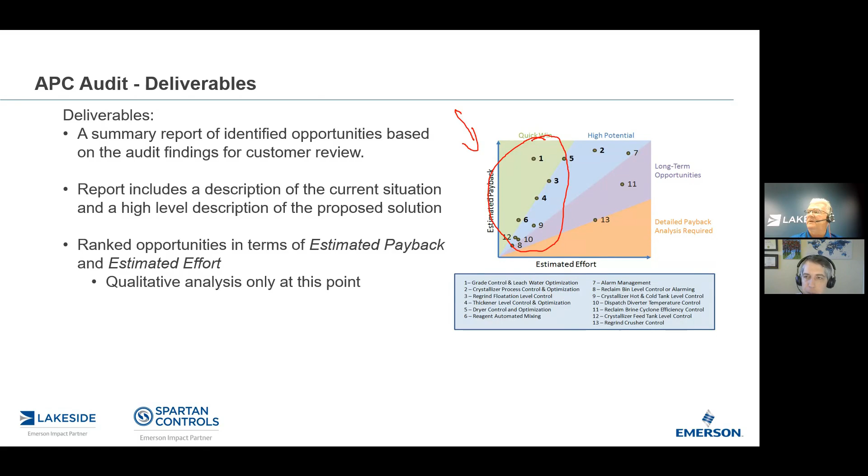So we're opening it up for questions right now. And Devin, we do have a question here.

Question one: are all your APC controls based on DeltaV control systems? I'll let you answer that one. Yeah, so our mining applications so far have all been in DeltaV. Now, I will add, it adds a little bit of a twist to this, but Emerson recently acquired a majority stake in Aspen Technology, which is a global advanced process control suite, mostly focusing on model predictive control. So they don't have things like IQC, but we can also have that conversation as well.

Question number two: how do you coordinate basic process controls such as PID with APC controls for smooth operation? How do you switch between optimizing mode and normal operation mode? That's a really important part of doing advanced process control. And again, I'm biased, but one of the real advantages of doing it in DeltaV is that the configuration can take place in the same module even, so you can cascade a PID loop to your AO block.